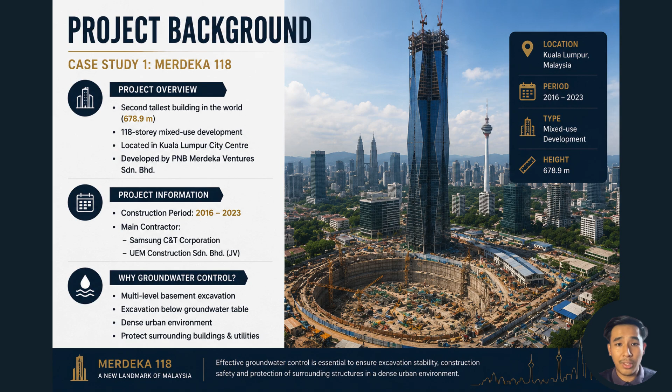The site consists of variable soil deposits over weathered rock formation and has a naturally high groundwater table. Since the basement excavation extended below the groundwater level, groundwater continuously flowed into the excavation area. In addition, Kuala Lumpur experiences heavy rainfall throughout the year, which further increases groundwater recharge and makes groundwater control even more challenging. Therefore, the engineering priority was to maintain excavation stability, control groundwater ingress and protect nearby structures throughout the construction process. Furthermore, I will discuss the main groundwater problems encountered during the excavation works.

Merdeka 118 is a landmark mixed-use development located in Kuala Lumpur City Centre and is currently recognized as the second tallest building in the world, with a height of approximately 678.9 meters and 118 stories. The project was developed by PNB Merdeka Ventures Sdn Bhd and constructed through a joint venture between Samsung C&T Corporation and UEM Construction Sdn Bhd. Construction began in 2016 and was completed in 2023.

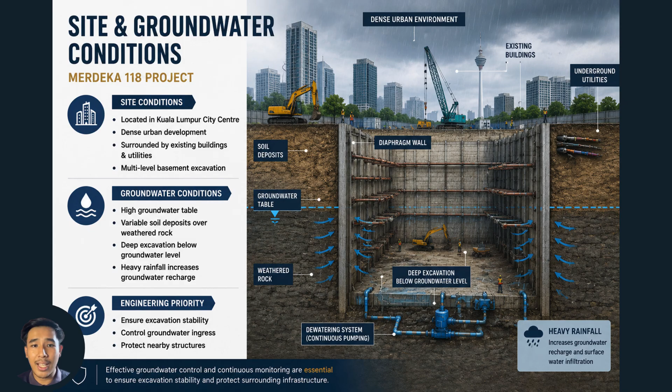Besides the super tall tower, the development also includes office spaces, a luxury hotel, retail areas and an observation deck. One of the most challenging aspects of this project was the construction of its multi-level basement, since the excavation extended below the natural groundwater table and was carried out in a densely populated urban area. Effective groundwater control was essential to prevent water ingress, maintain excavation stability, and protect nearby buildings and underground utilities. Next, I will explain the site and groundwater conditions that made this project particularly challenging.

One of the greatest challenges during the basement construction of Merdeka 118 was groundwater management. Since the excavation was carried out below the natural groundwater table, groundwater continuously entered the excavation area, making it difficult to maintain dry and safe working conditions. Besides groundwater seepage, the project also faced risks such as ground settlement and hydrostatic pressure acting on the retaining structure. If these issues were not properly controlled, they could affect excavation stability and potentially damage nearby buildings, roads and utilities.

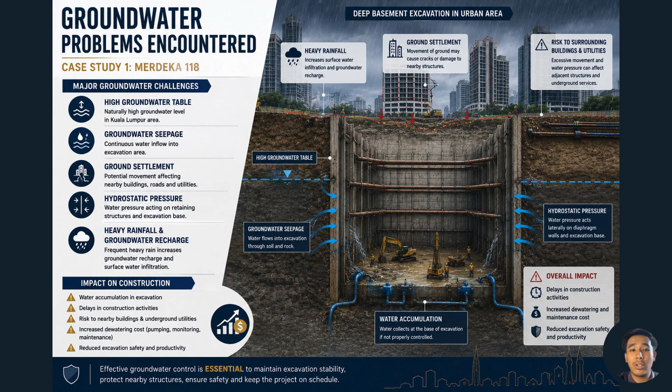Another challenge was Kuala Lumpur's tropical climate, with heavy rainfall, increased groundwater recharge, and surface water infiltration, requiring the dewatering system to operate continuously throughout the construction period. This groundwater-related problem also increased construction costs due to additional pumping, monitoring, and maintenance requirements. Therefore, an effective groundwater control strategy was essential to ensure both safety and project progress. Moving on, I will now pass the floor to Amirul to explain the groundwater control and dewatering methods used to overcome this challenge.

Thank you, Hanif. So I will continue to explain the groundwater or dewatering method. Groundwater control at Merdeka 118. The project team employed an integrated strategy combining a physical barrier with active water removal. For example, the diaphragm wall with 800 mm thickness serves as both a structural retaining system and a low-permeability vertical barrier. By enclosing the site with interlocking concrete panels, the project significantly reduced the horizontal inflow of groundwater from the surrounding urban area.

Next is the continuous pumping system. Despite the diaphragm wall, water still seeps through the base or joints. A network of submersible pumps was used to continuously remove this water, keeping the water table depressed below the active excavation floor. Lastly, deep piling support. The foundation design included 137 reinforced concrete deep piles with 2.2-meter diameter to ensure the superstructure weight was safely transferred through the variable soil into stable strata even while the surrounding ground was being dewatered.

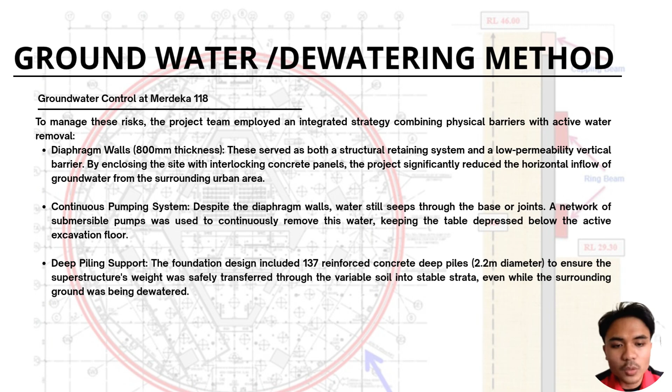Let's continue to discuss the material, equipment, and machinery. To begin, several key pieces of equipment were essential for maintaining a safe and dry excavation site. The submersible pump was used to continuously remove groundwater from the excavation area, while the dewatering pipes transferred the collected water to a designated discharge point. A diaphragm wall serves as a retaining structure to also minimize groundwater inflow into the excavation. To monitor groundwater condition throughout the project, piezometers were installed to measure groundwater level.

In addition, settlement markers were placed around the site to detect any ground movement or settlement caused by excavation and dewatering activity. Lastly, the generator provides backup power to ensure that pumping operations continue without interruption even during a power outage.

So let's continue to groundwater monitoring and testing. Groundwater level monitoring. Groundwater levels are continuously monitored using instruments such as piezometers to ensure the water table remains within safe limits during excavation. This helps engineers evaluate whether the dewatering system is effectively controlling groundwater and identify any abnormal change early. Next, settlement monitoring. Settlement monitoring measures any movement or sinking of the ground around the excavation site. The data helps protect nearby buildings, roads, and underground utilities by allowing engineers to take corrective action if excessive settlement is detected.

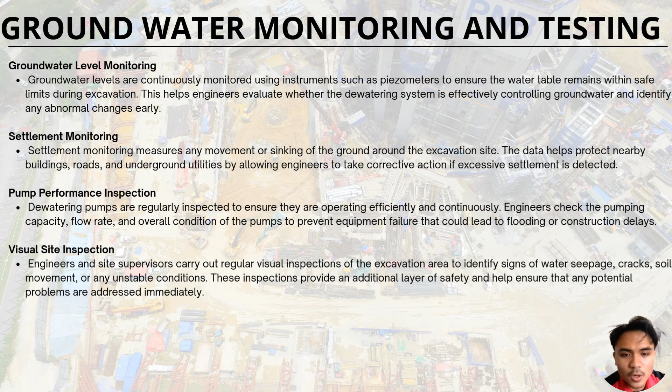Next is pump performance inspection. The dewatering pumps are regularly inspected to ensure they are operating efficiently and continuously. Engineers check the pumping capacity, flow rate, and overall condition of the pumps to prevent equipment failure that could lead to flooding or construction delay. Lastly, visual site inspection. Engineers and site supervisors carry out regular visual inspection of the excavation area to identify signs of water seepage, cracks, soil movement, or any unstable condition. This inspection provides an additional layer of safety and helps ensure that any potential problems are addressed immediately.

Next, I discuss the cost considerations involved in implementing the groundwater control system. The first major cost was the cost of pumps. Since groundwater had to be removed continuously throughout the excavation, submersible pumps were essential. The project budget included not only the purchase and installation of these pumps but also their replacement whenever necessary due to wear or unexpected failure. Another significant expense was electricity. Because the pumps operate almost continuously during the excavation period, they consume a considerable amount of power. As a result, electricity became one of the largest operating costs of the dewatering system.

The project also included monitoring costs. Instruments such as piezometers and settlement markers had to be installed and inspected regularly. Engineers also analyzed the collected data to ensure that groundwater level and ground settlement remained within safe limits throughout construction. In addition, there were maintenance costs. Pumps, dewatering pipes, generators and monitoring equipment required routine maintenance and occasional repair to keep the system operating efficiently and to avoid unexpected breakdowns that could interrupt construction.

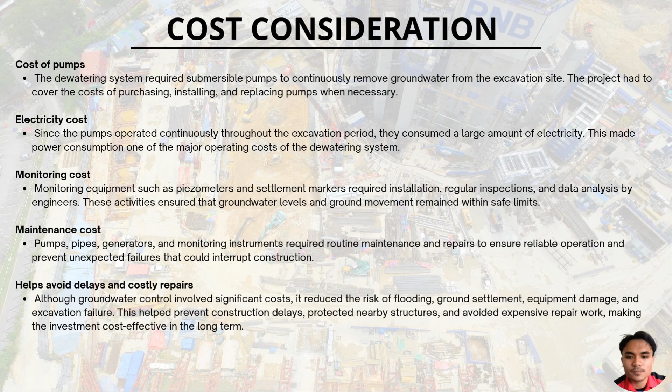Moving on to the solutions implemented, we addressed several major challenges during construction. For the high groundwater level, a continuous dewatering system was operated to keep the excavation dry and stable. To control groundwater seepage, we combined the diaphragm wall with the pumping system to effectively reduce water inflow. To prevent excessive ground settlement, we carried out regular settlement and groundwater monitoring, allowing us to identify any changes early and respond immediately. During periods of heavy rainfall, continuous pumping was supported by proper surface drainage management to prevent water accumulation within the excavation. Finally, to ensure excavation safety, regular inspection and maintenance of the entire groundwater control system were conducted throughout the project. Thank you, Amirul Hakim.

Now we move to the next one, which is chapter 4, that discusses the Tun Razak Exchange, which is TRX, infrastructure works and the groundwater management challenges faced during its construction.

First, let me introduce the project. Tun Razak Exchange, or well known as TRX, is Malaysia's first international financial district. It is located in the center of Kuala Lumpur and covers about 70 acres.

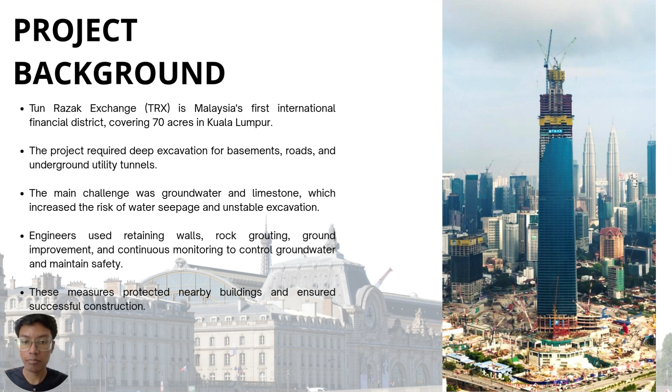To overcome these challenges, the project team carried out several groundwater control measures. They monitored groundwater movement, sealed cracks in the limestone using grouting, strengthened the soil, and continuously monitored the site. These measures helped to control groundwater and protected nearby buildings and infrastructure.

Now, let's look at the organizations involved in this project. The project is called Tun Razak Exchange Infrastructure Works, located in Kuala Lumpur. The client and master developer was TRX City Sdn Berhad, which managed the overall development. The lead engineering consultant was EDP Consulting Group Sdn Berhad, which was responsible for engineering design, groundwater studies, retaining system, grouting works, and site monitoring.

The main infrastructure contractor was WCT Berhad, which carried out earthwork, road construction, utility installation, and other infrastructure work. These organizations worked together to ensure the project was completed safely and that groundwater was properly controlled throughout the construction process.

Now we move on to the site and water conditions. The Exchange 106 project at TRX was built on Kuala Lumpur limestone, which contains many cracks and underground cavities. Combined with a high groundwater table, excavation became very challenging due to the risk of flooding, ground settlement, and sinkholes.

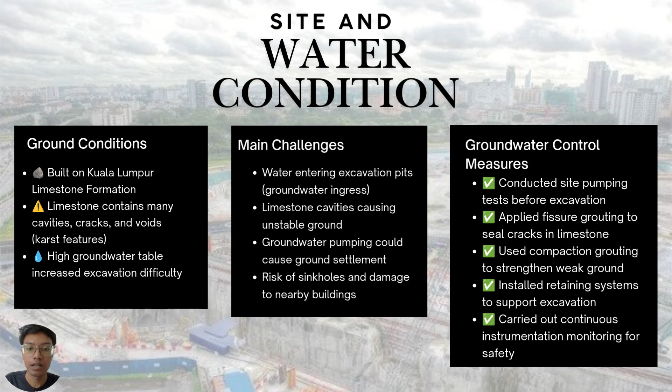To overcome these issues, engineers carried out pumping tests, sealed limestone cracks by using fissure grouting, strengthened weak ground with compaction grouting, installed a retaining system, and continuously monitored ground movement throughout construction.

After that, I will explain the groundwater problems encountered. Groundwater management was one of the biggest challenges at the TRX project because the site had a high groundwater table and karstic limestone with many cavities and cracks. These conditions increased the risk of water entering the excavation, ground settlement, and damage to nearby buildings.

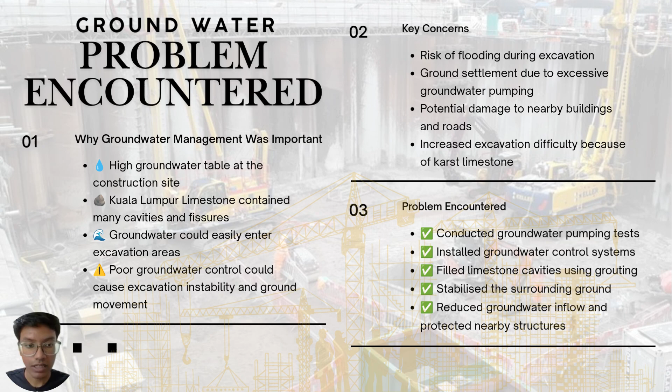To minimize these risks, engineers conducted pumping tests, controlled groundwater levels, filled underground cavities through grouting, and continuously stabilized the ground during construction. Next, I will pass this presentation to Muhammad Atif.

So for the next part, I will explain the groundwater control methods used in the TRX infrastructure project. Groundwater control was very important because the project was built in the Kuala Lumpur limestone formation, where the groundwater level was high and the ground conditions were challenging. Before excavation started, engineers carried out site pumping studies and groundwater drawdown assessment to understand how lowering the groundwater level would affect nearby buildings and infrastructure.

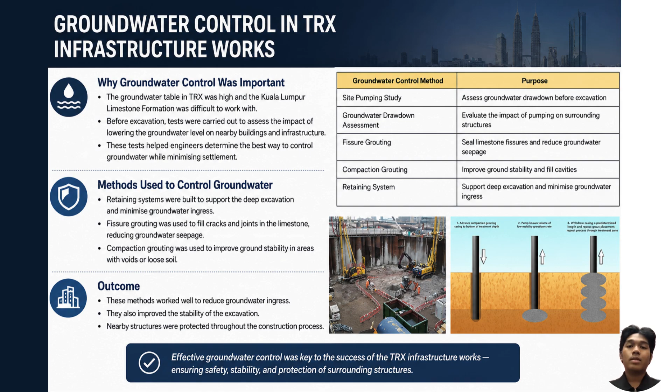Several groundwater control methods were then implemented, including retaining systems, fissure grouting, and compaction grouting. These methods reduced groundwater ingress, improved excavation stability, and protected the surrounding structures throughout the construction process.

For the next part, the materials, equipment, and machinery used for groundwater control. The TRX project used different equipment to ensure that the deep excavation was carried out safely and effectively. Pumping systems were used to control groundwater drawdown, while grouting pumps and cement grout were used to seal the limestone fissures and underground cavities.

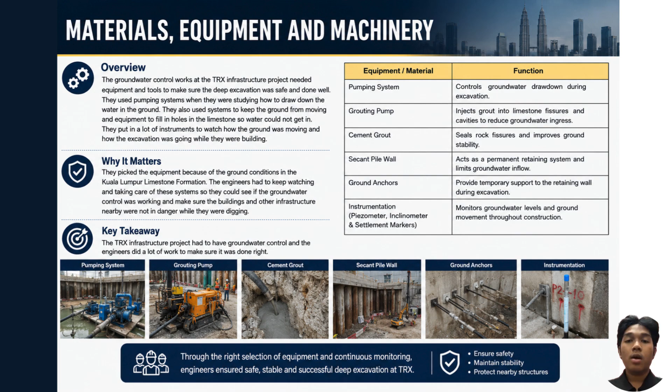Secant pile walls and ground anchors provided support to the excavation, while monitoring instruments such as piezometers, inclinometers, and settlement markers continuously measured groundwater levels and ground movement. Selecting the right equipment and maintaining it throughout construction helps to ensure that the groundwater control remains effective and that nearby structures stay safe.

Groundwater monitoring and testing played an important role throughout the TRX project. Engineers continuously monitored the groundwater levels, the ground movement, and the performance of the groundwater control system to make sure excavation remained safe. This allowed them to quickly identify any unusual conditions before they became serious problems.

Several monitoring instruments were used, just like I mentioned earlier, including piezometers to measure the groundwater levels, inclinometers to monitor the lateral ground movement, and settlement markers to detect any surface settlement. Continuous monitoring helps minimize the risk to nearby buildings and underground utilities, and ensured that the project met its design requirements.

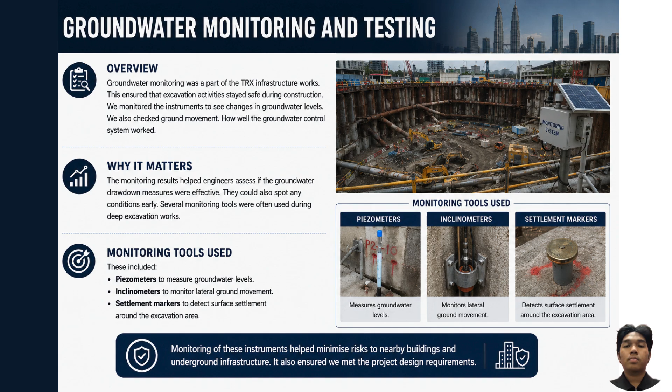Although additional costs were required for pumping studies, grouting works, instrumentation, and continuous monitoring, these investments significantly reduced the risk of excavation failure, excessive settlement, and construction delays.

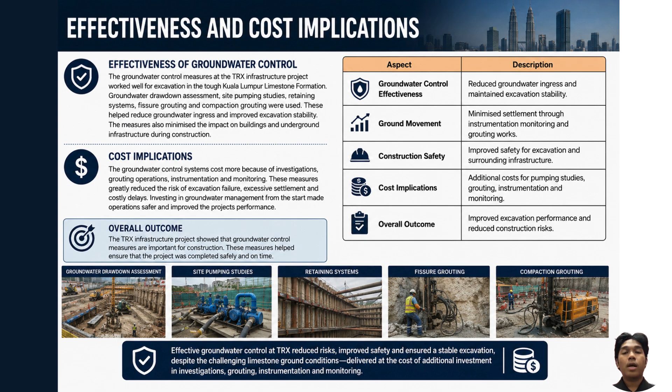Overall, the benefits of groundwater control outweigh the additional costs and contribute to the successful completion of the project. In summary, this chapter discussed how groundwater was successfully managed during the TRX infrastructure project. The project faced significant challenges due to high groundwater levels and the Kuala Lumpur limestone formation.

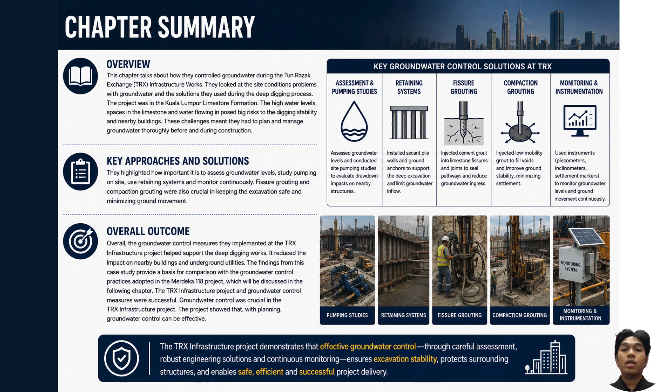To overcome these challenges, engineers carried out groundwater assessment, pumping systems, retaining systems, grouting works, and continuous monitoring throughout the construction. These measures improved excavation stability, reduced groundwater ingress, protected nearby buildings and underground utilities, and ensured the project was completed safely. The findings from this case study will also serve as a useful comparison with the groundwater control practices used in the Merdeka 118 project, which will be discussed in the next slide.

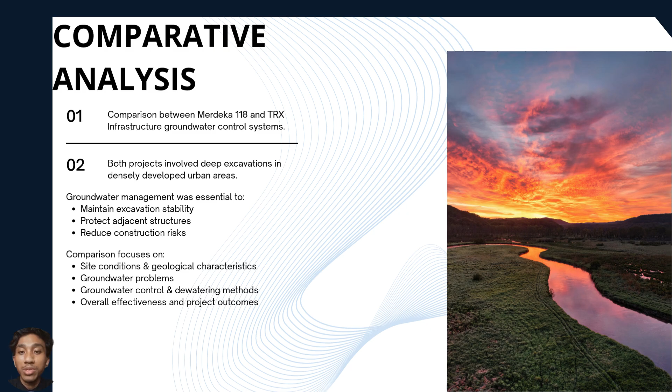In this comparison, we focus on four main aspects, which are the site conditions and geological characteristics, groundwater problems, groundwater control and dewatering methods, and finally, the overall effectiveness and project outcomes. First, let's look at the site conditions and geological characteristics. Both Merdeka 118 and TRX are located in densely developed urban areas in Kuala Lumpur. Because of this, both projects had to protect nearby buildings, roads, and underground utilities during excavation. Before construction started, detailed geotechnical investigations were carried out to understand the soil and groundwater conditions.

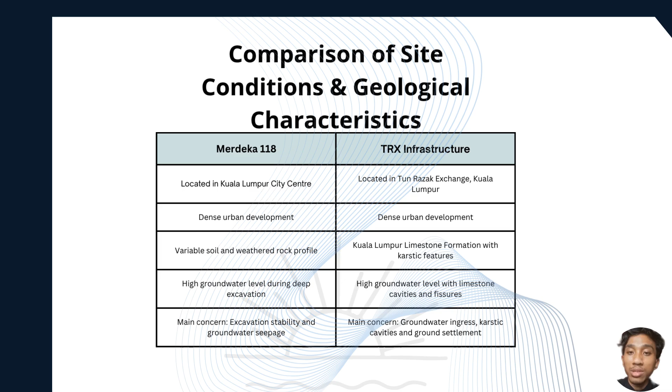However, the geological conditions are different. Merdeka 118 consists mainly of variable soil and weathered rock with a high groundwater table. Therefore, the main engineering concern was maintaining excavation stability and controlling groundwater seepage. On the other hand, the TRX project is located on the Kuala Lumpur limestone formation, which contains karst features such as limestone cavities and fissures. These conditions make groundwater flow more unpredictable and increase the risk of ground settlement. Because of this, TRX required additional ground improvement works before excavation. Overall, although both projects had similar urban environments, TRX faced more complex geological challenges.

Next, we compare the groundwater problems faced by both projects. Both projects experienced several common issues, including a high groundwater table, groundwater seepage, hydrostatic pressure, and the risk of ground settlement. These problems could affect excavation stability and potentially damage nearby structures if not properly controlled. For Merdeka 118, the main challenge was preventing groundwater from entering the deep basement excavation while maintaining a stable and safe working environment. In contrast, TRX had additional challenges because of the limestone geology. The presence of cavities, fissures, and complex groundwater pathways made groundwater behavior difficult to predict. As a result, groundwater management at TRX was much more complicated and required additional engineering solutions before excavation could begin.

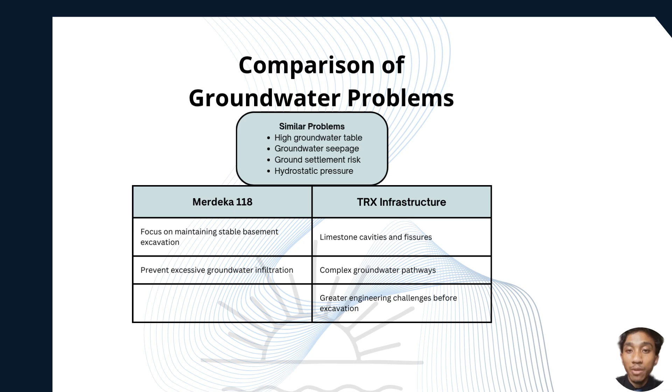Now let's compare the groundwater control methods used in both projects. Both projects used similar basic groundwater control methods, including dewatering systems, continuous pumping, retaining structures, and continuous groundwater monitoring. These methods help reduce groundwater inflow and maintain excavation stability. However, the TRX project adopted several additional techniques. These included groundwater drawdown assessment, site pumping studies, fissure grouting, and compaction grouting. These methods were necessary because of the limestone cavities and cracks, which allowed the groundwater to flow unpredictably. Meanwhile, Merdeka 118 mainly relied on dewatering systems together with retaining structures and continuous monitoring to keep the excavation dry and stable throughout the whole construction. This shows that the groundwater control strategy depends greatly on the geological conditions of the project site.

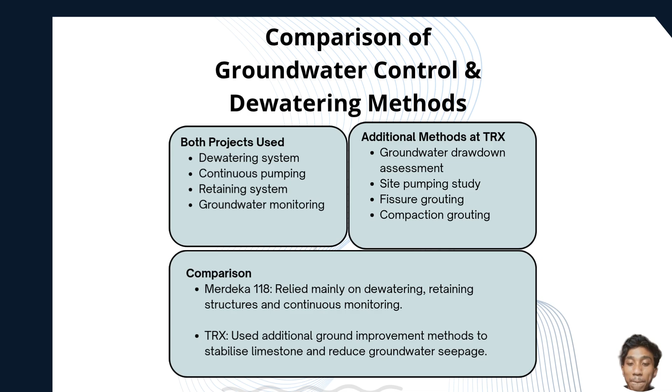Finally, we look at the overall effectiveness of both projects. For Merdeka 118, the groundwater control system successfully maintained excavation stability, reduced construction delays, and protected nearby buildings through effective dewatering and continuous monitoring. For the TRX project, although the groundwater control system required higher costs due to additional investigations, grouting works, and monitoring equipment, it successfully reduced groundwater ingress, minimized ground settlement, and improved excavation safety. In conclusion, both projects successfully managed groundwater according to their site conditions. Merdeka 118 used a simpler groundwater management approach that focused on dewatering and monitoring, while TRX required a more comprehensive groundwater control strategy because of its challenging limestone geology.

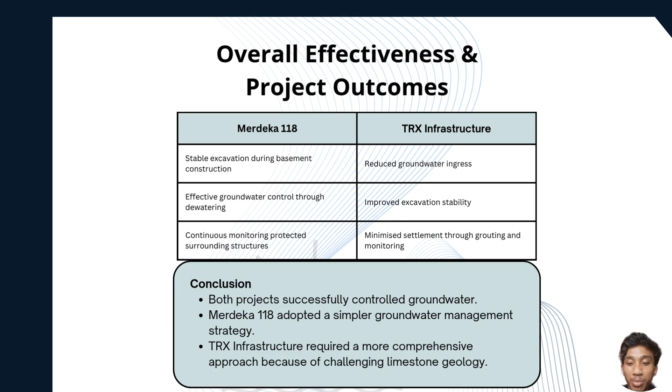We hope our presentation has helped you better understand the importance of groundwater control in construction projects. We also hope that the knowledge we share today will be useful for your future study and career.